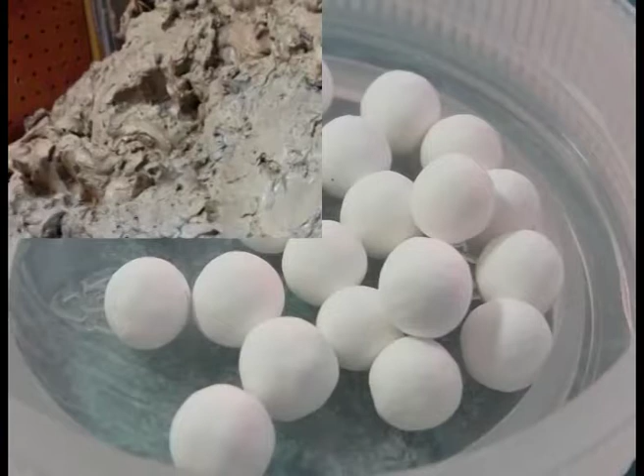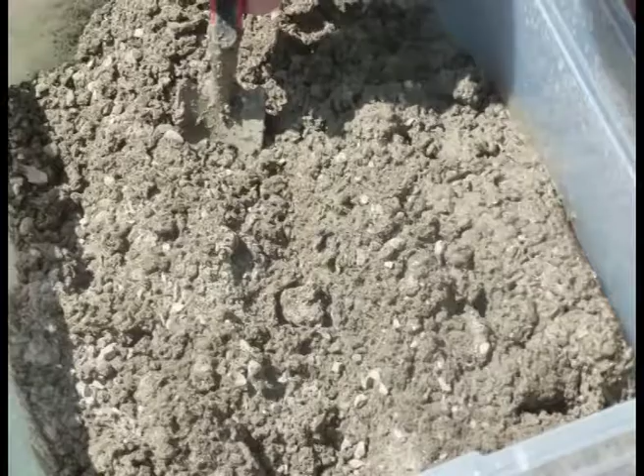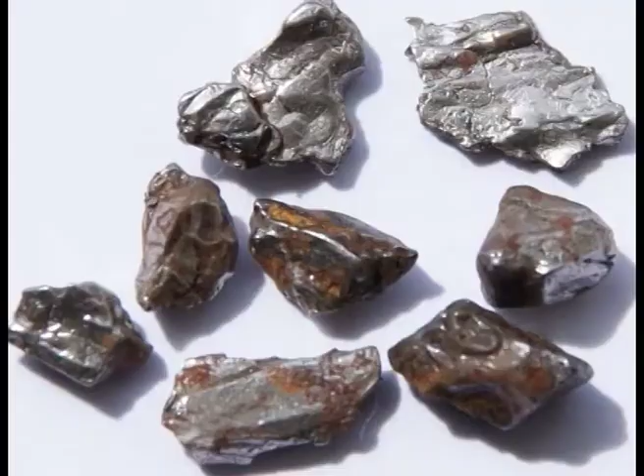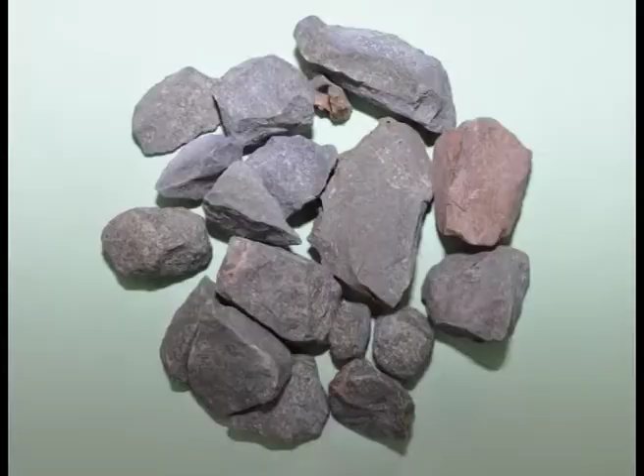If you think of bricks as artificial rocks, cement might be considered artificial lava, a liquid stone that is poured into place where it hardens into solidity. Cement is a manufactured product made by blending different raw materials and firing them at a high temperature in order to achieve precise chemical proportions of lime, silica, alumina, and iron in the finished product known as cement clinker. Cement is therefore essentially a mixture of calcium silicates and smaller amounts of calcium aluminates that react with water and cause the cement to set.

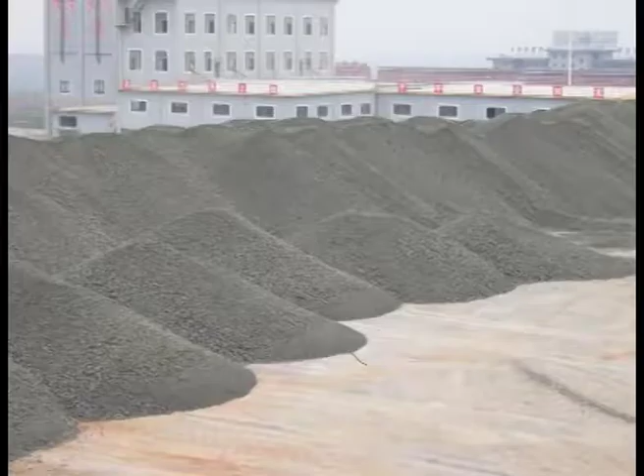The requirement for calcium is met by using high calcium limestone or its equivalent calcareous raw material, and clay, mudstone or shale as the source of most silica and alumina. Finished cement is produced by finely grinding together around 95% of cement clinker with 5% gypsum or anhydrite, which helps to retard the setting time of the cement.

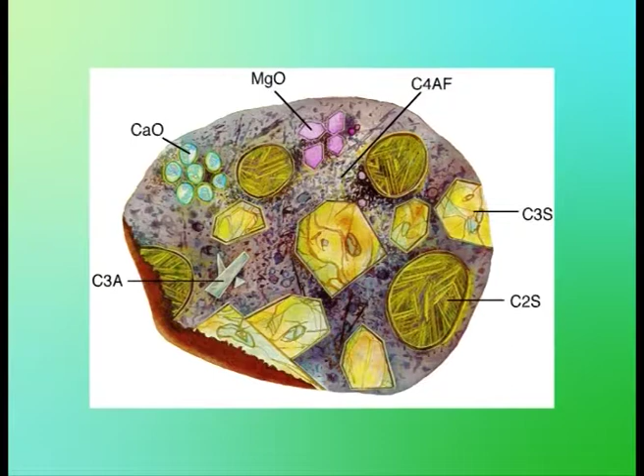The quality of cement clinker is directly related to the chemistry of raw materials used. Around 80 to 90% of raw material for the clinker feed is limestone. Clay raw material accounts for between 10 to 15%, although the precise amounts will vary. Magnesium carbonate, which may be present in limestone, is the main undesirable impurity. The level of magnesia, MgO, in the clinker should not exceed 5%, and many producers favor a maximum of 3%. This rules out dolomite or dolomitic limestones for cement manufacture.

Other deleterious materials include excessive alkalis, Na2O or soda, and potassium oxide, K2O, which would be unacceptable because of durability problems with the concrete due to the reaction of alkalis with some siliceous aggregates to form a swelling gel.

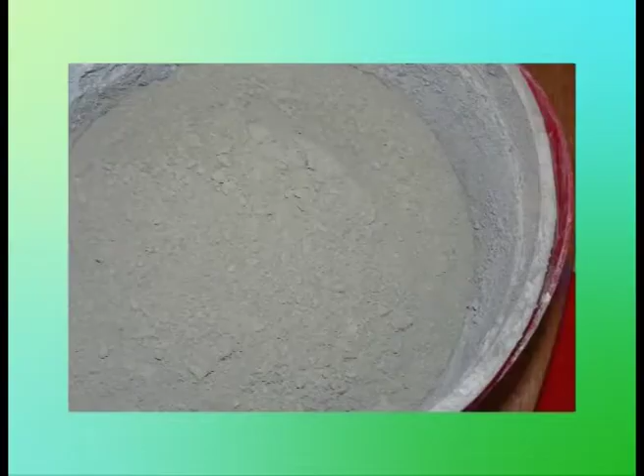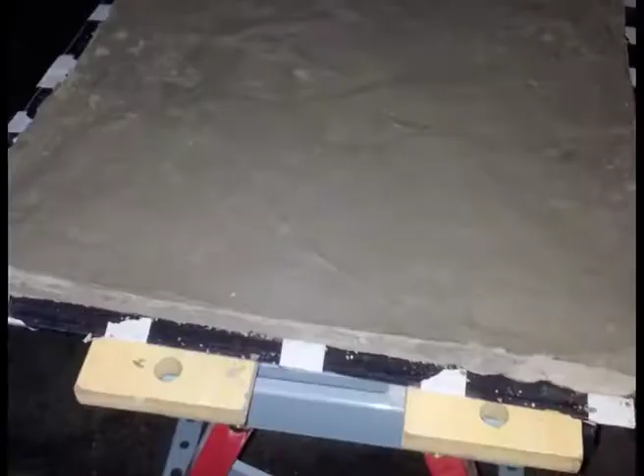Portland cement. Portland cement is the most widely produced cement, both in India and worldwide. The term Portland cement was created by its inventor in 1824 because of the presumed resemblance of the set material to Portland stone, the well-known natural building stone. Other varieties include rapid hardening, low heat, sulfate resisting, and low alkali cements. In addition, blended cements are produced by finely grinding Portland cement clinker with other constituents such as blast furnace slag, natural pozzolanas, silica fume, metakaolin, siliceous fly ash, calcareous fly ash, limestone fines, and shale.

In Europe, for example, these types of cement are standardized to BS EN 197-1. This covers 5 main types of cement used for concrete and indicates the relative proportions of Portland cement clinker, a second main constituent, the standard or 28-day strength class and the rate of early strength gain.

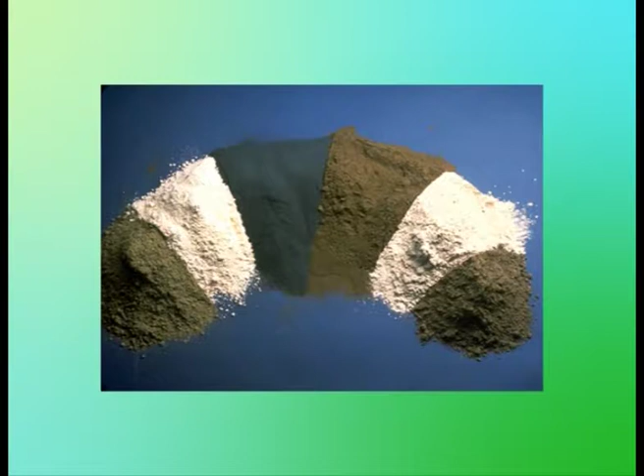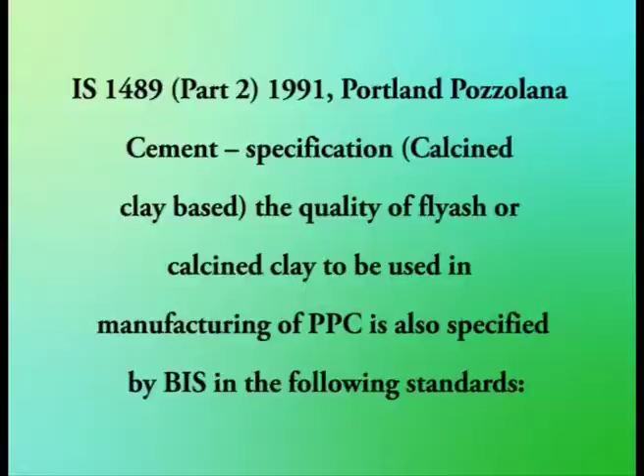The Indian standards for Portland pozzolana cement have been issued in two parts based on the type of pozzolanic materials to be used in manufacturing of Portland pozzolana cement, as given below. IS 1489 Part 1 1991, Portland pozzolana cement specification, fly ash based. IS 1489 Part 2 1991, Portland pozzolana cement specification, calcined clay based. The quality of fly ash or calcined clay to be used in manufacturing of PPC is also specified by BIS in the following standards. IS 3812-1981, specification for fly ash as pozzolana and admixture. IS 1344-1981, specification for calcined clay pozzolana.

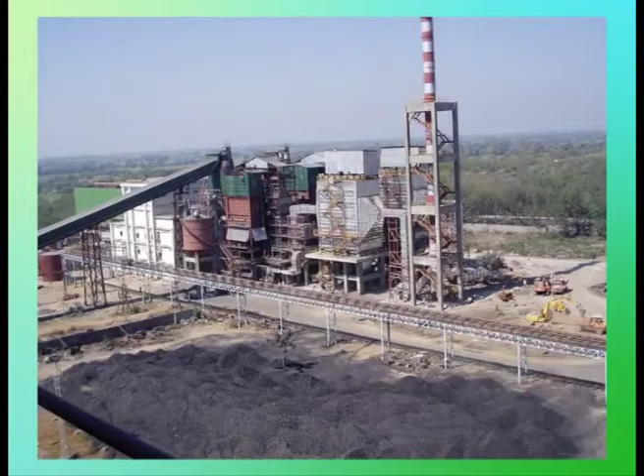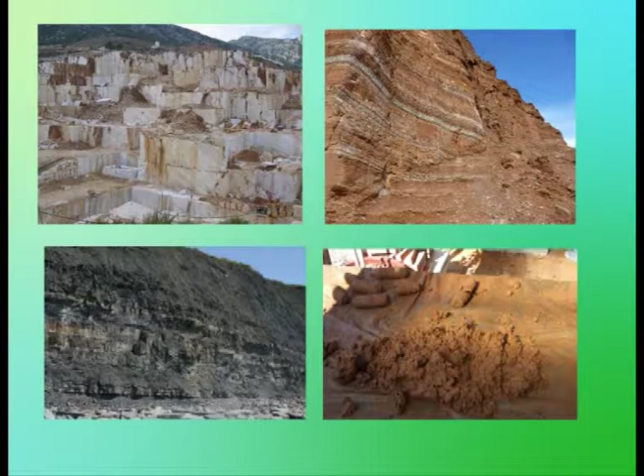Deposits. The availability of suitable raw materials is normally the determining factor in the location of cement works, and these are normally located in close proximity to limestone deposits and ideally close by other major raw materials like clay and gypsum. Limestones, clay, mudstone, and shale deposits are common lithologies and are widely distributed in most parts of the world. Nevertheless, such sedimentary rocks may vary considerably in their chemistry and thickness, and thus in their suitability for cement manufacture on a large scale.

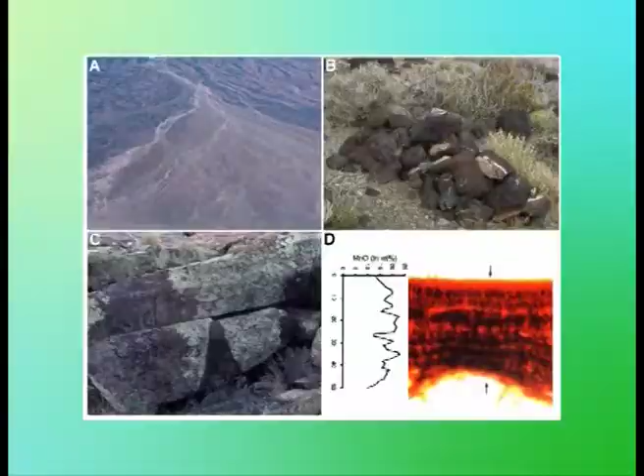Generally, large quantities of a uniform source of calcium, silica, alumina, and iron are required. If uniform raw materials are not readily available, and they rarely are, it is essential that chemical variation within the deposit is known so that development can be planned and proper blending of stockpiles can consistently achieve the desired chemistry. The process of cement making is, however, remarkably flexible in terms of the raw materials that can be used to achieve required chemical compositions. Many limestone deposits, provided they are low in MgO, easily meet the requirements, and a number of other CaO containing raw materials are also known to be used.

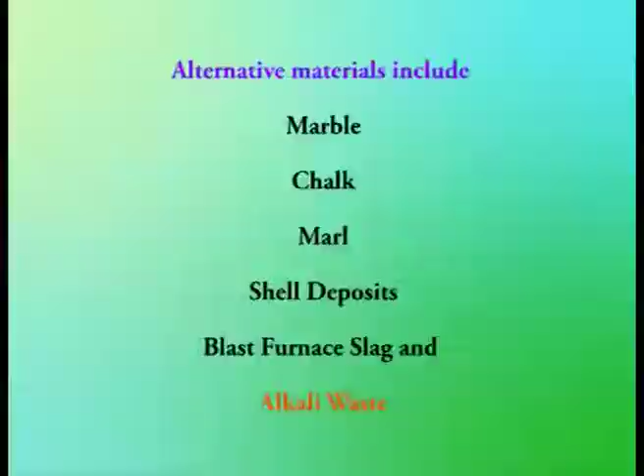Alternative materials include marble, chalk, marl, shell deposits, blast furnace slag, and alkali waste. The overburden to limestone deposits is also used frequently as a source of silica, alumina, and iron. Other mineral components such as iron oxide wastes, silica sand, etc. are sometimes used to blend into the raw material mix to optimize the chemistry. The variety of raw material used worldwide for cement manufacture is very great.

Extraction. The raw materials used in cement manufacture are extracted in large quarries, typically with outputs of up to or over 2.5 million tons per year.

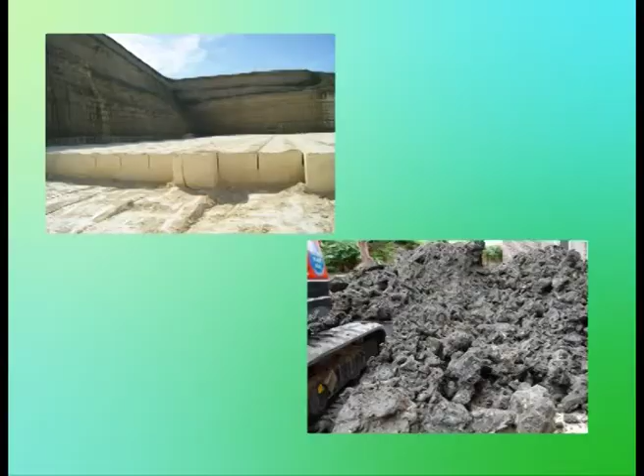Typically about 1.65 tons of limestone, 1.5 to 1.8 tons, and 0.4 tons of clay are quarried for each ton of cement produced. Large reserves of feedstock, particularly of limestone, are required to provide security of supply, and these are normally quarried in close proximity to the cement works. Clay or mudstone may be worked in the same or an adjacent quarry or transported from more distant sites.

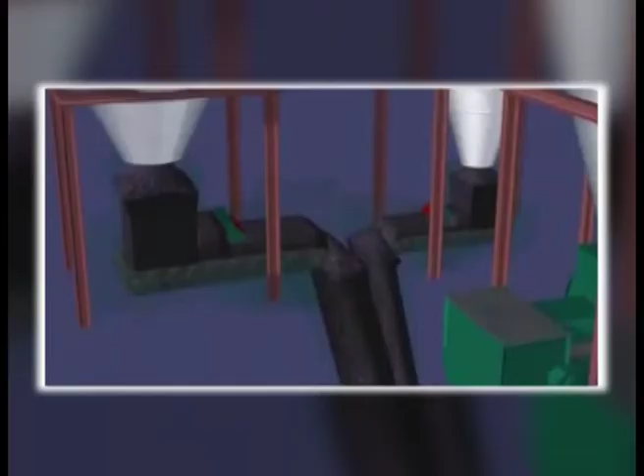The raw materials which supply cement works and which may be required in quantities of over 4,000 tons per day must be thoroughly proven if the plant is to run successfully. Consistent quality feed is required, and an extraction plan must be made to ensure that a uniform flow of raw material will always be available to the kilns.

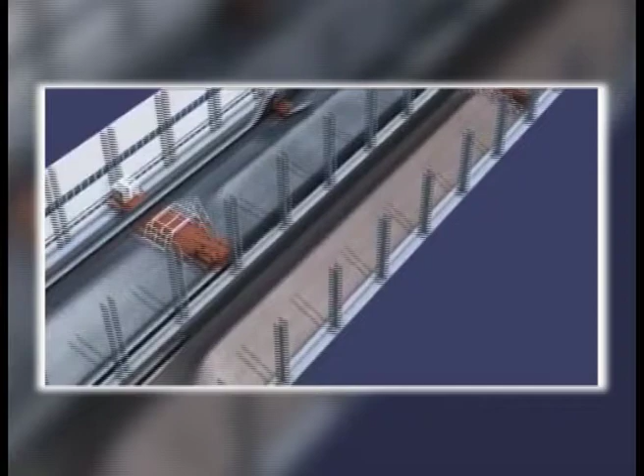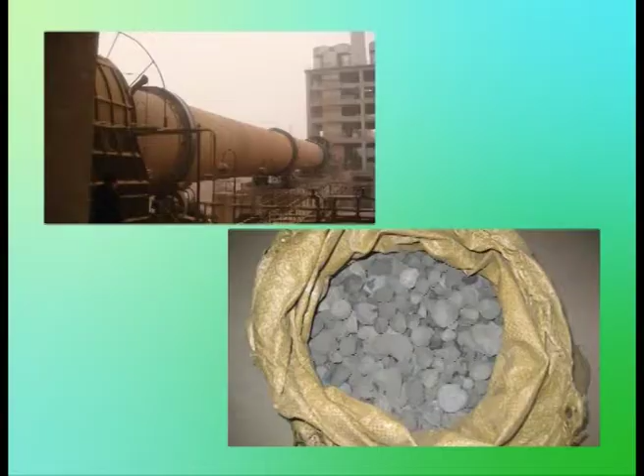Cement making. Cement clinker is manufactured by heating the blended and ground raw material, typically limestone and clay or shale and other materials, to partial fusion. The clinker burn takes place at a temperature of 1450 degrees Celsius in kilns, which are normally inclined, rotating cylinders lined with heat-resistant bricks. Clinker emerges from the kiln after several hours as granulated spherical pebbles.

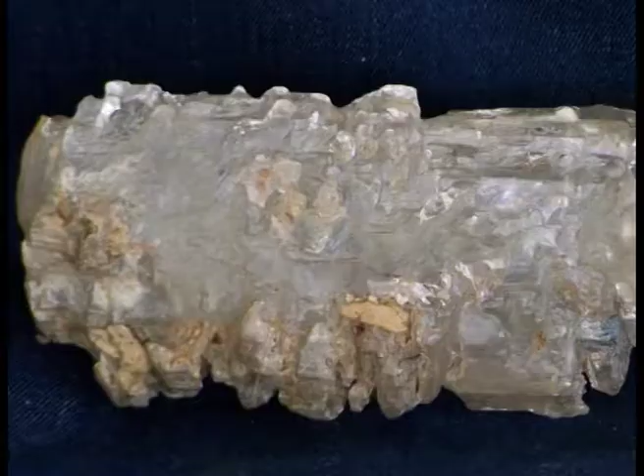Afterwards, the clinker is finely ground by ball milling with a small amount, typically 5%, of gypsum/anhydrite to give Portland cement. Gypsum/anhydrite is introduced to control the initial rate of reaction with water and to allow concrete to be placed and compacted before hardening commences.

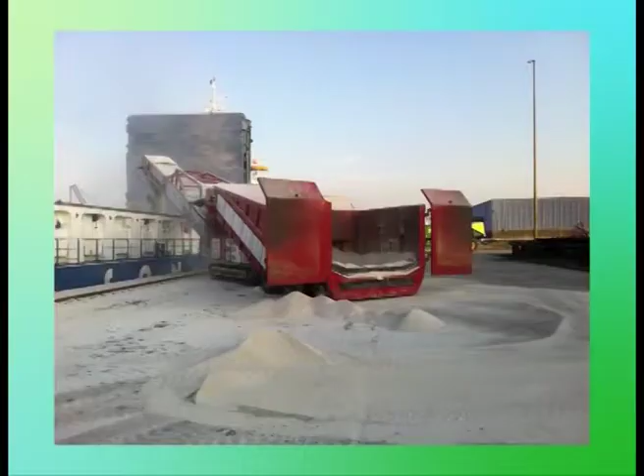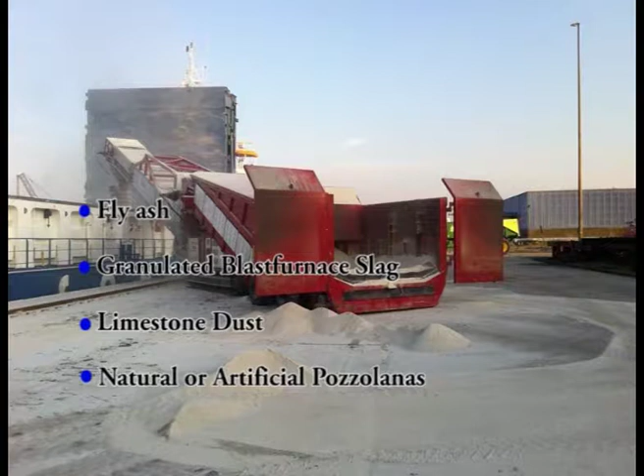Blended cements are produced by intergrinding cement clinker with materials like fly ash, granulated blast furnace slag, limestone dust, natural (for example volcanic ash) or artificial (for example metakaolin) pozzolanas, in addition to gypsum/anhydrite. The finished cement is transported in bulk or in bags to the market. Cement clinker and finished cement are traded internationally.

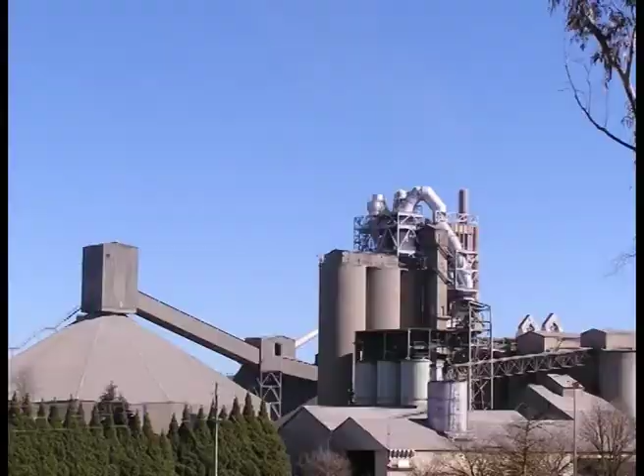Cement manufacture is a very energy intensive process and results in the production of large amounts of carbon dioxide, CO2. The carbon dioxide is chiefly produced when the calcareous raw material is calcined to produce calcium oxide. Generally, around 0.5 tons of carbon dioxide is released for each ton of cement produced, a figure that does not include carbon dioxide released during energy generation to power cement manufacturing plants. Worldwide, it is thought that cement making is responsible for around 7% of total man-made CO2 emissions.

The processes of milling, blending, calcining, and grinding the clinker are described as dry, semi-dry, semi-wet, or wet, depending on how the raw material is handled before being fed into the kiln. Moisture content of the raw materials, ranging from 3% for hard limestone to over 20% for soft limestones such as chalk, is the main criterion governing the process used.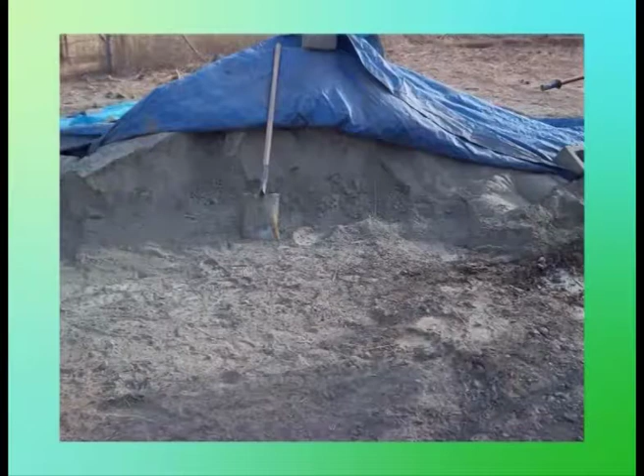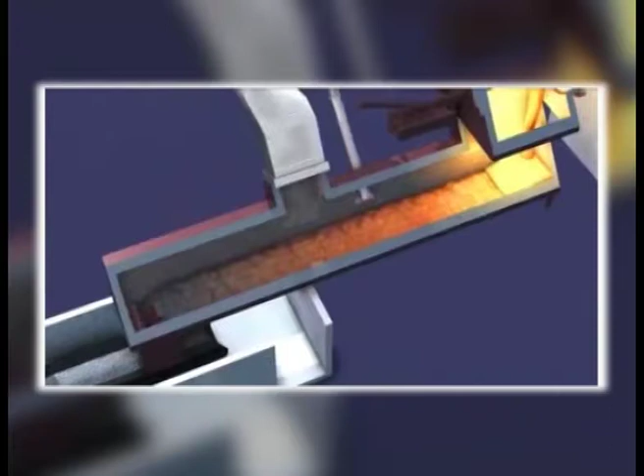In the dry process, the feed material is in a dry, powdered form. It is either preheated by the kiln's hot exit gases prior to entering the kiln (preheater kiln), or, if fuel is added in a special combustion chamber, the calcination process can almost be completed before the raw material enters the kiln (pre-calciner kiln).

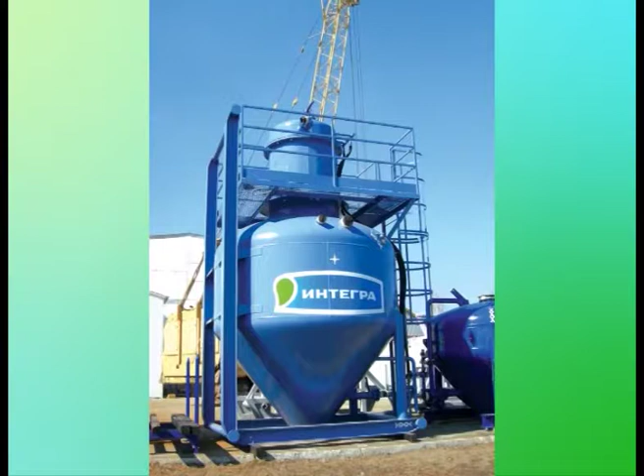In the wet process, the feed material is made by wet grinding and the resulting slurry, which contains typically 30 to 40% water, is fed directly into the kiln. In the semi-dry or semi-wet process, water is either added to the ground dry feed or removed from the slurry by filter pressing, resulting in a feed material containing about 15-20% moisture.

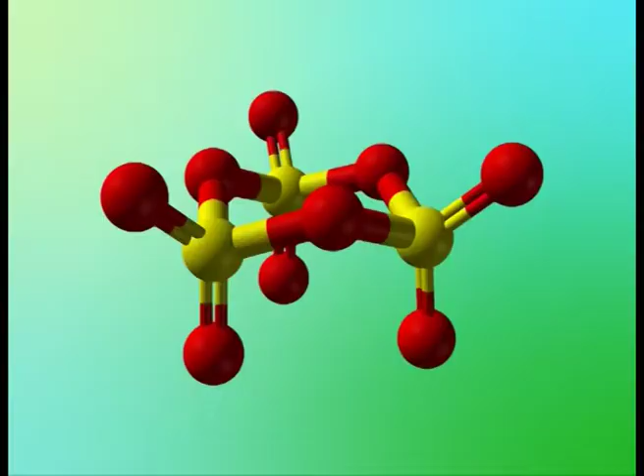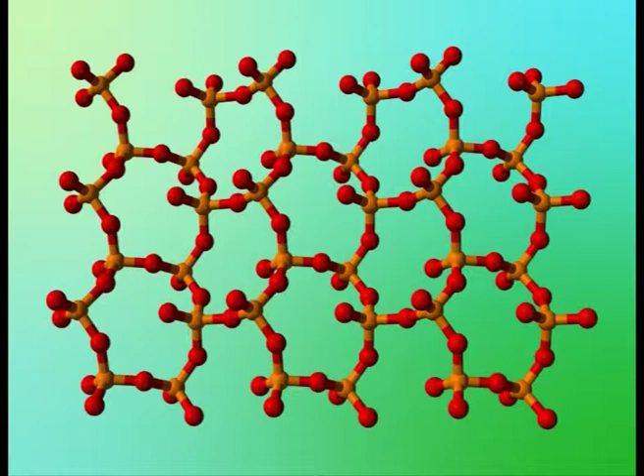Specifications and uses. Most national specifications for Portland cement require that the cement should not contain more than 5% MgO, less than 3% in the limestone raw material. Therefore, identification of dolomite is crucial in the evaluation of carbonate rocks for cement manufacture. Other chemical specifications may limit sulfur trioxide SO3 and phosphorus pentoxide P2O5 to less than 1% and total alkalis to less than 0.6%. Additional specifications may apply to specialty cement types such as sulfate resisting cement, oil well cement, and white cement, for example, less than 0.01% Fe2O3.

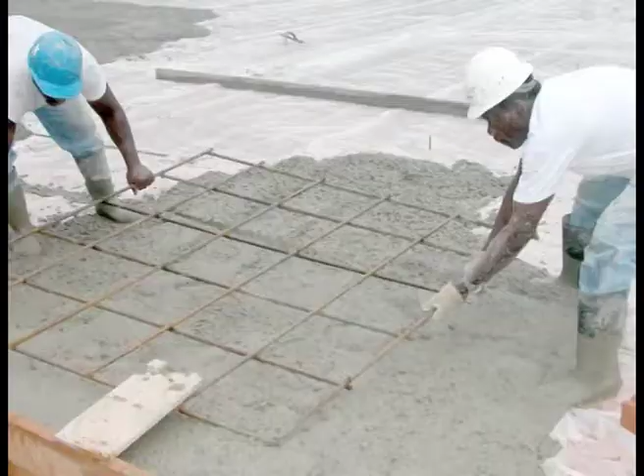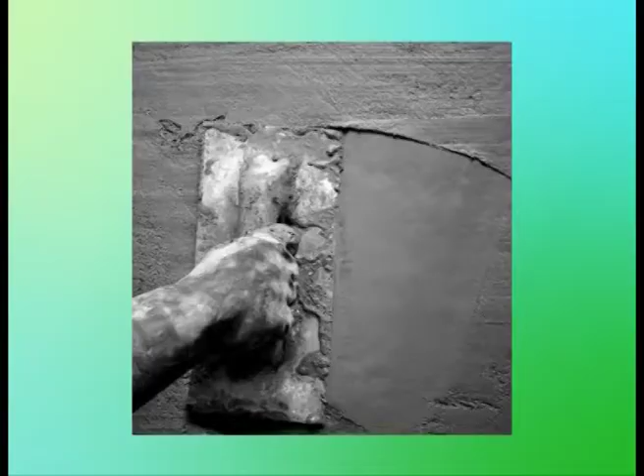Uses. Cement is an essential constituent of concrete, which is a mixture of cement and coarse and fine aggregate. When mixed with water, this material can be placed in situ or cast in molds, such as concrete blocks. It is a highly versatile building material valued for its high compressive strength, fire resistance, moldability, impermeability, and durability. Mortar, a mix of cement, fine aggregate, and water, is used for joining structural blocks, brickwork, and plastering.

Both concrete and mortar are vital and essentially irreplaceable construction materials for the building and civil engineering industries. They are widely used in all construction sectors, including house building, road construction, bridges, and dams, and in other infrastructure projects such as railways, airport facilities, hospitals, schools, new offices, and shops. Demand for cement is a function of economic activity and construction activity, both of which can be highly cyclical.

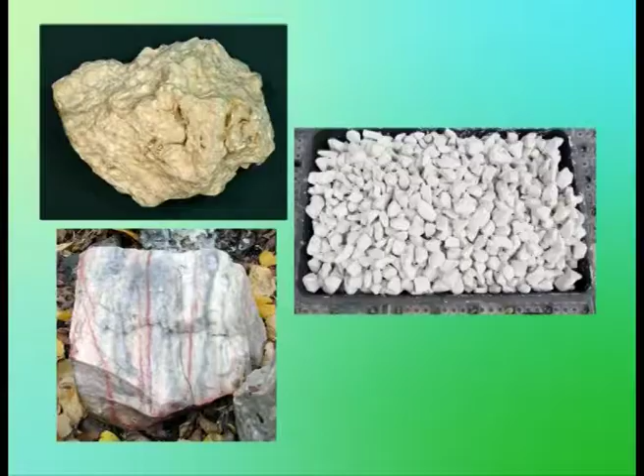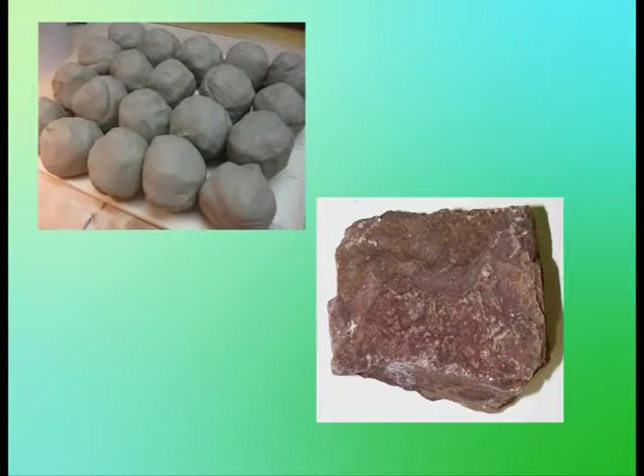Alternative raw materials. The principal objective of using alternative raw materials is to optimize the mix to make best use of available raw materials. A range of calcareous raw materials can be used for cement manufacture, but limestone, chalk, or marble predominate. In most cases, other calcium-bearing sources do not occur in sufficiently large deposits or amounts to be used as alternatives. Clay/mudstone is the main source of silica, alumina, and iron oxides because of its availability and low cost.

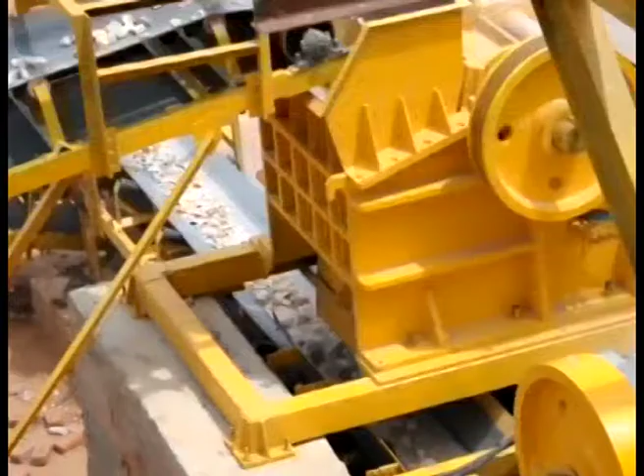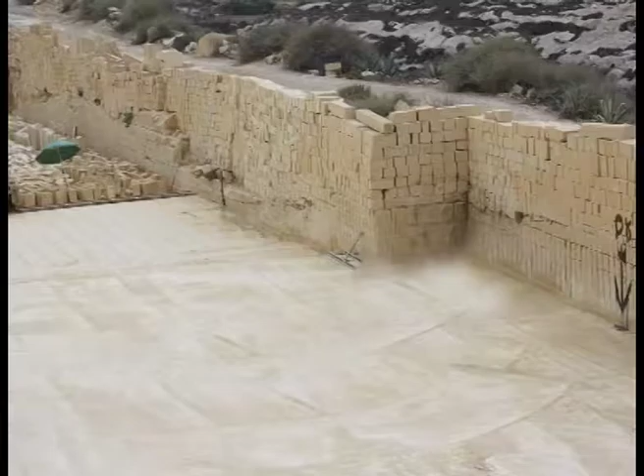However, mudstone often does not supply the correct chemical balance of constituents, and bought-in supplements are sometimes required. These may include silica sand, fly ash, pulverized fuel ash PFA, iron oxides, and bauxite. PFA has a higher alumina to silica ratio than most mudstones and also lower alkalis. It is used in most cement plants to add alumina so that higher silica limestone can also be utilized. It also helps to reduce alkalis. Ash from the coal burn also contributes to the overall chemistry of the cement feed. However, alternative fuels are increasingly substituting for coal.

The production of blended cements is increasing. These may contain, for instance, singly or in combination, a proportion of PFA, a byproduct of coal-fired power stations, blast furnace slag, a byproduct of iron making, tuff, a type of volcanic rock, and limestone dust.

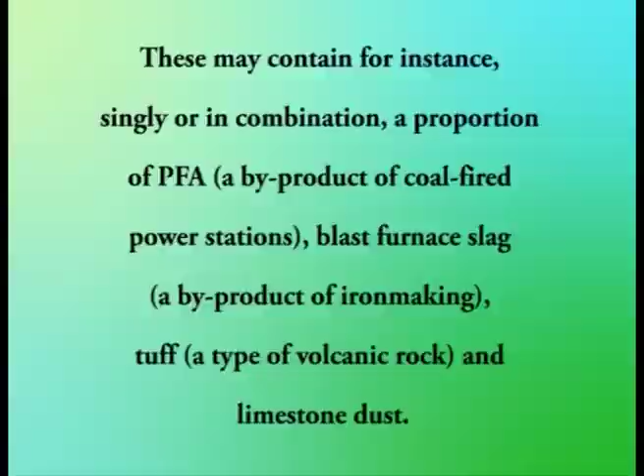These act mainly as lower cost diluents, their main purpose being to reduce the amount of cement clinker used per unit of concrete produced. However, their use may also impart additional properties to the product. Both PFA and slag, for example, have cementitious properties.

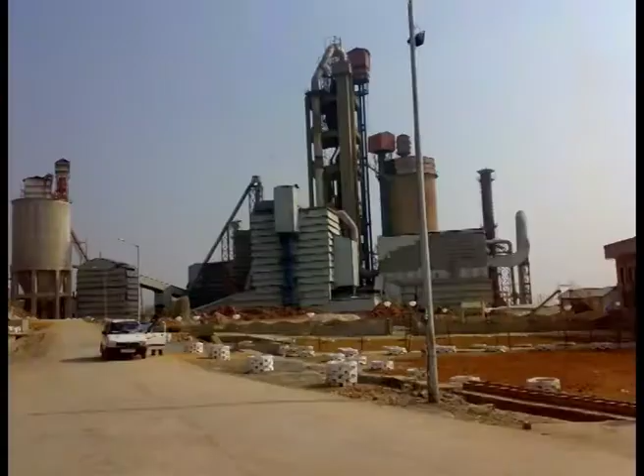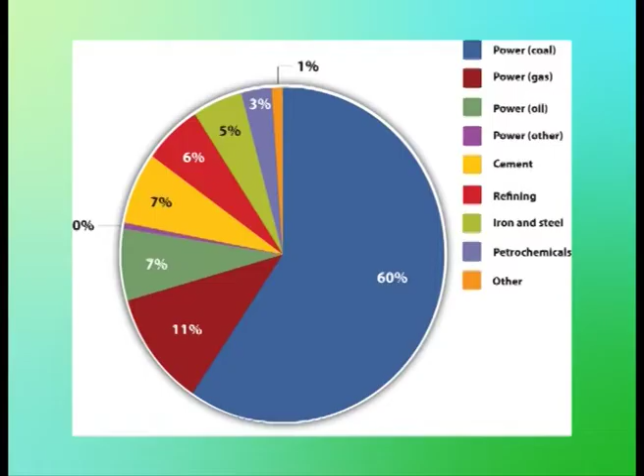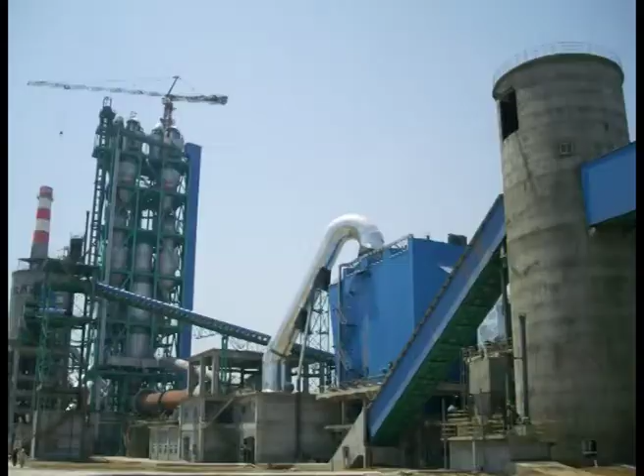The rising costs of raw materials like gypsum and coal have been placing a heavy strain on the cement and construction industry. As a result, Indian cement and plaster board companies have to explore alternative sources of gypsum and coal. The Indian cement industry is comprised of 140 large and more than 365 smaller cement plants.

It is the second largest cement producer in the world with an installed capacity of about 323 million TA in 2011, surpassing the target of 298 million TA fixed for the 5-year period up to March 31, 2012. Economic growth and cement consumption are directly proportional.

The factors that could trigger cement sales are infrastructural demand, especially for government projects, as well as higher housing demand in rural and semi-urban areas. Higher realization and rising dispatches are considered to be conducive for higher profits for the cement industry. All efforts are targeted to increase sales and reach the premium segment in prices.

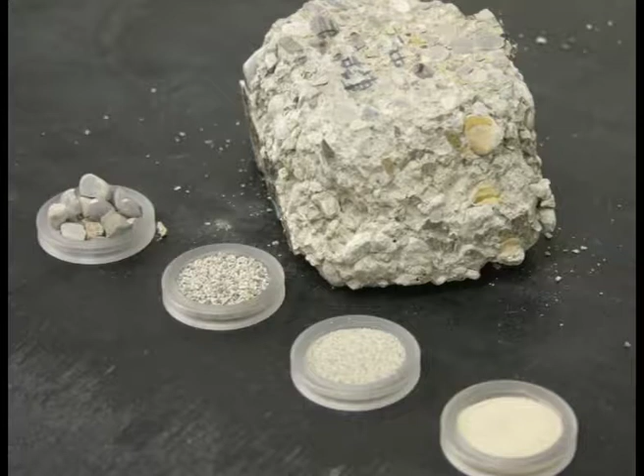The major challenges faced by the Indian cement industry are higher raw material prices, especially the price of coal, gypsum, and fly ash. India's cement manufacturing capacity may increase to 479 million TA by the terminal year of the Plan 12, ending 2017, despite the existing overcapacity scenario as per projections made by a Planning Commission working group on the sector.

The working group, which has already submitted its final report to the Commission for preparing the roadmap for the sector in the plan period 2012-17, has projected a 10 to 11.75% growth in demand, production, and the installed capacity of cement during the 5-year period.

According to the Cement Manufacturers Association (CMA) and AT Kearney, India's cement production will expand to 550 million tons by 2020, and its annual per capita use of cement will rise to 350 kg from 150 kg. McKinsey and Company is targeting to achieve 860 million tons cement capacity by 2030.

According to the various research reports and in view of the upcoming massive infrastructure projects, cement consumption is expected to advance at around 10% CAGR growth during 2012-2014 and thereafter around 9 to 12% per year, which is anticipated to strengthen the long-term investment viability of the Indian cement industry.

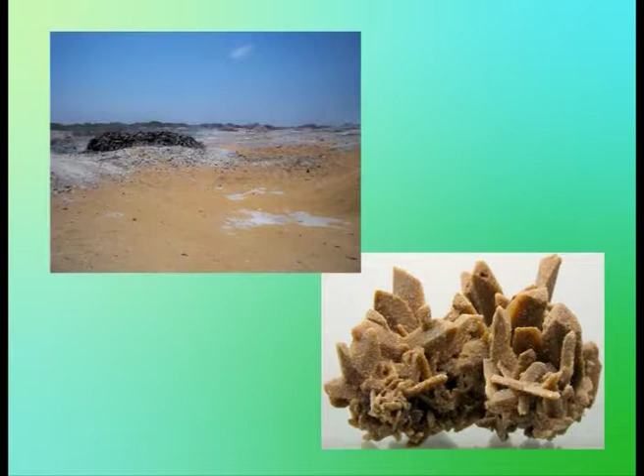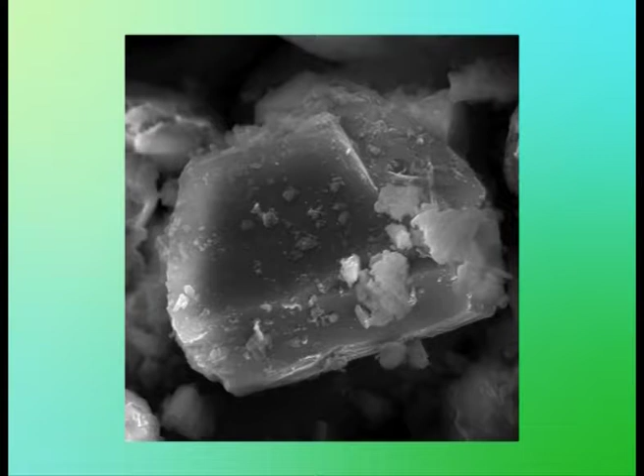As per the Indian Bureau of Mines (IBM), around 5 million tons of waste gypsum such as phosphogypsum, fluorogypsum, etc. are being generated annually. And for the last 3 years, the cement sectors are only using around 2.25 to 3 million tons. Basically, these quantities are almost constant and cannot be increased substantially due to higher transportation costs.

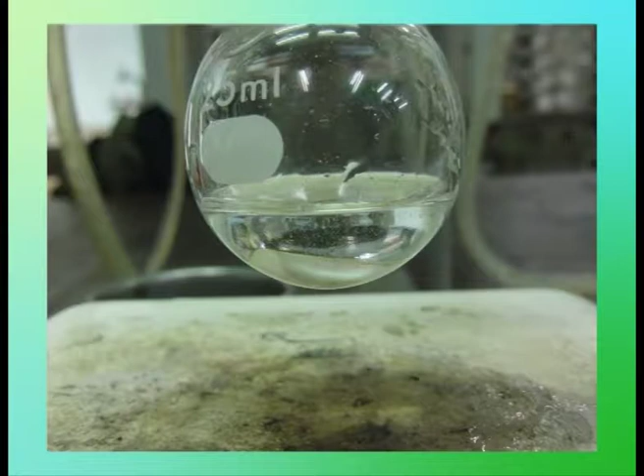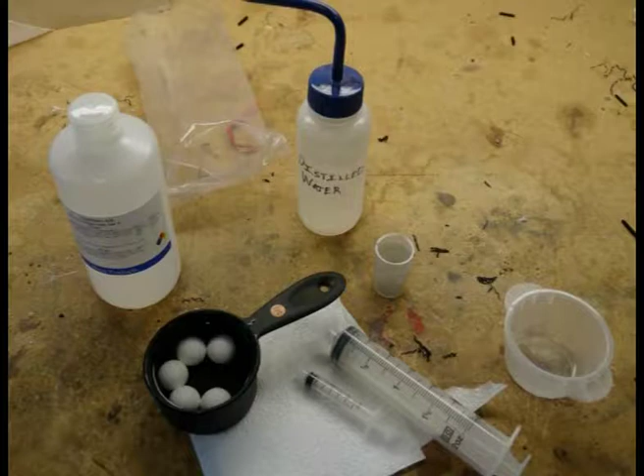Phosphogypsum is a byproduct in the wet process for manufacturing phosphoric acid, ammonium phosphate fertilizer by the action of sulfuric acid on the rock phosphate. The other sources of phosphogypsum are byproducts of the hydrofluoric acid and boric acid industries.

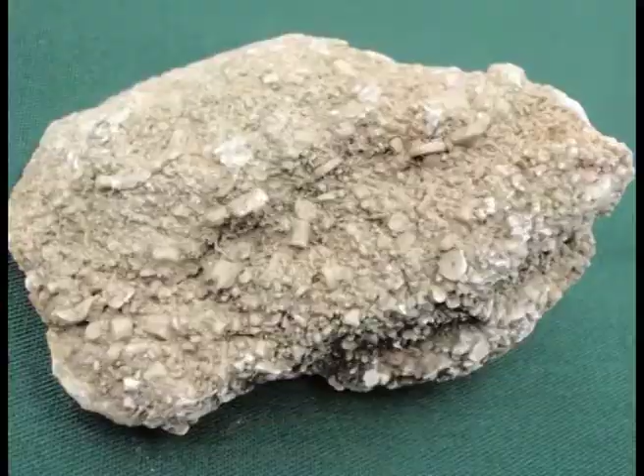Indian cement companies are on the lookout for overseas mines to secure supplies for gypsum, a key ingredient for manufacturing the building material. Domestic supply of gypsum is limited, which is forcing Indian cement makers to look for acquisitions of overseas mines, or even look at producing a synthetic form of the raw material.

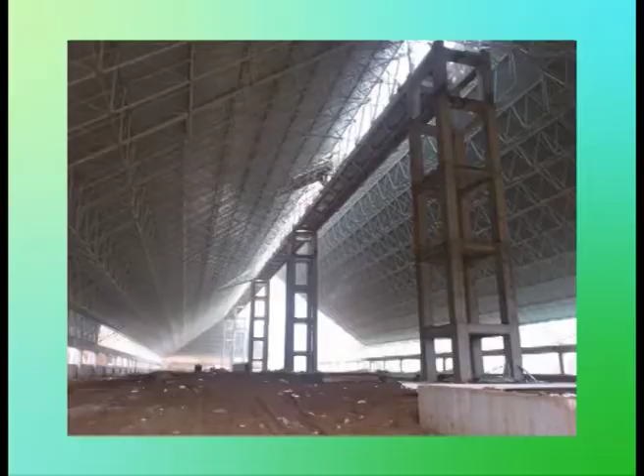1 ton of gypsum in a reserve typically costs around $26 to $30, rupees 1,560 to 1,800, and the average size of a mine overseas ranges between 30 and 40 million tons. This takes the minimum total cost to roughly $780 million. Indian companies are eyeing reserves located in Thailand, Oman, Iran, and other countries in close proximity to India.

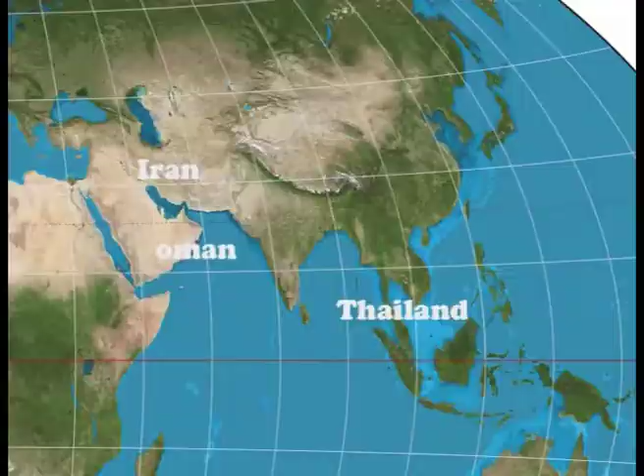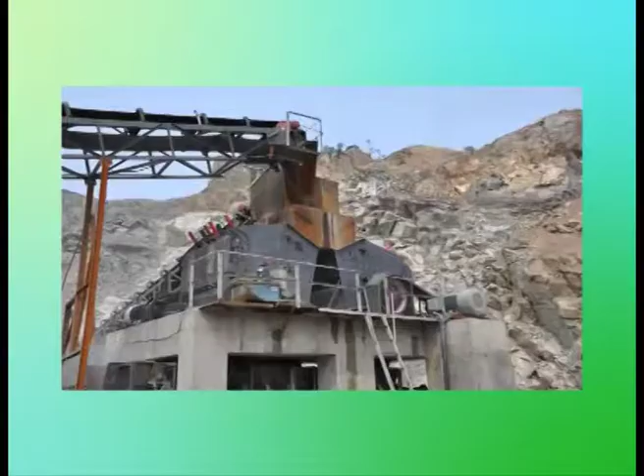According to a research report jointly published on 30th April 2014 by lobby group Confederation of Indian Industry and consulting firm A.T. Kearney, India has a paucity of gypsum resources, which does not bode well for the cement industry. The production deficit in the domestic market has led to increased dependence on imports and synthetic gypsum to meet production demand, the report said. Manufacturing 1 ton of cement generally requires 4 to 5% of gypsum as a raw material, it added.

The report said that at present, usable gypsum reserves in India amount to 140 to 150 MT, of which around 125 MT is available to the industry. These numbers are for Rajasthan and Gujarat, as reserves in other states are unusable. This available supply will be enough to support the cement industry for the next 7-8 years, beyond which the sector will need to rely on imports, the report added.

Impact of cement industry. Human environment. Increased direct and induced employment opportunities, income and wealth. Increased goods and services. Improved access, particularly to previously inaccessible areas. Conflicts with existing land uses and displacement of existing uses.

Subsistence risk to local farmers and rural livelihoods and cultures, damage to cultural sites, increased demands on services and facilities, social and cultural conflicts, community instability, boom-bust economies, displacement of local populations, road damage, traffic delays, health and accident risk, secondary developments. Natural environment: impacts on landform.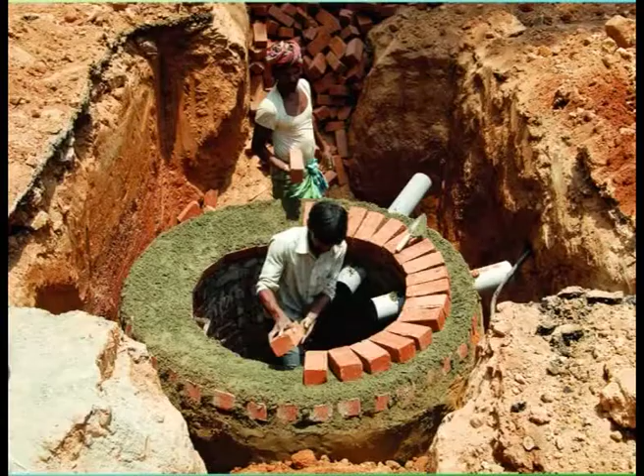Removal and transfer of large amounts of rocks and soil and its deposition as spoil elsewhere. Total disruption and modification of landscapes. Changes, possibly irrevocable, to underground and surface drainage. Loss of existing land uses. Loss or burial of vegetation and farmland under mine spoil. Damage to wetlands and coastal areas.

Use of stream banks and shorelines for waste disposal and ancillary facilities, disruption, blockage, and rerouting of stream channels and creation of residual ponds. Land impacts on terrestrial ecology. Reduced reproduction and population of wildlife due to habitat modification and loss, for example breeding grounds, nurseries, and indirect disturbances from noise and fumes. Increased wildlife mortality from road traffic and surface disturbance, degradation of vegetation and soil from flooding of

contaminated watercourses, modification of vegetation and introduction of non-native species, loss of birds and animals due to contamination from tailing and leach ponds, denuding of vegetation due to toxicity. Water impacts on aquatic ecology. Stream siltation and other forms of degradation of surface waters by soil erosion from disturbed areas, waste piles and stockpiles. Downstream water quality impairment and damage to aquatic flora and fauna.

Contamination of surface waters and groundwaters. Disruption, blockage of surface waters, intensifying local flooding problems and affecting aquatic ecology, including fisheries. Deepening of stream channels. Reductions in local water supplies. Impacts on soil. Contamination of surface areas with mineralized toxic rock material, for example, deposition of mining wastes. Impacts on air. Degradation of air quality and visibility from airborne particulates resulting from blasting, excavation, earth moving, transportation, and material transfer operations.

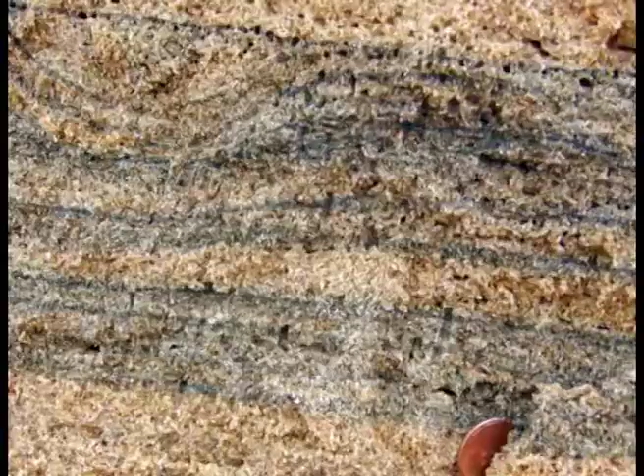Conclusion. In the early 1950s, the cement industry began putting a new emphasis on geology. Portland cement can be made from relatively abundant industrial minerals in rocks, and this may explain why cement producers placed little emphasis on geology during the early days of the industry. After World War II, however, the industry began to recognize the need for geological exploration, and some of the larger companies began to build a permanent geological staff.

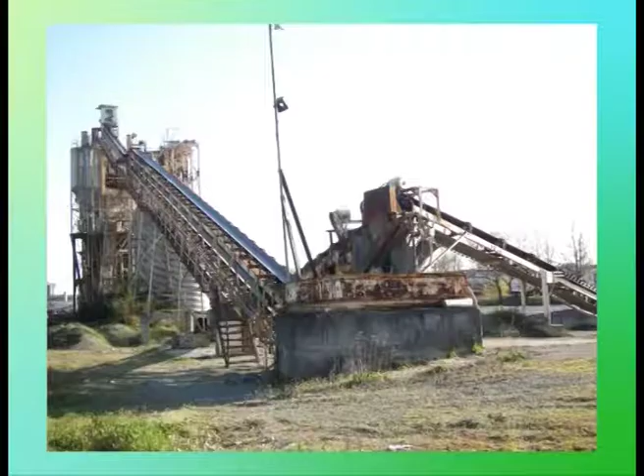This development has its roots in the rapid expansion of the industry after World War II and continuing into the early 1950s; the demand for cement far exceeded the production capacity. This placed a great deal of pressure on the producers to enlarge capacity at their plants and to develop new sites. The closing of many cement plants due to inadequate raw materials: producers feared lack of raw material due to inadequate exploration and evaluation.

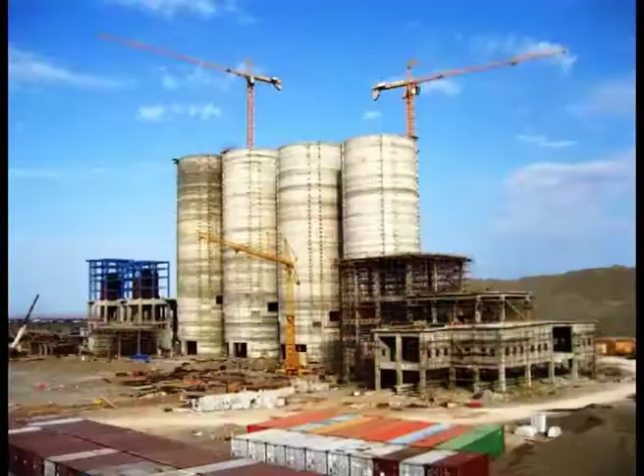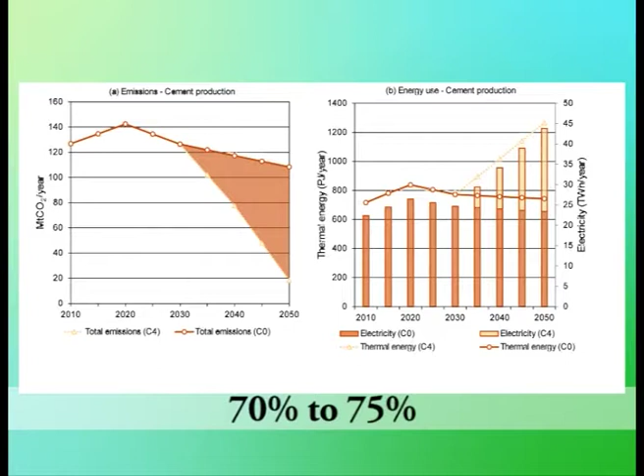An ever-increasing pressure for upgrading of the quality of Portland cement necessitated upgrading the quality of raw materials. The increasingly large capital investment needed to build new cement plants required a higher degree of accuracy in reserve calculation. For example, cement production capacity grew so rapidly that today production is only about 70 to 75% of rated capacity, 73.8% in 1963. Therefore, whereas the geologist's function during the active expansion of capacity was primarily one of exploration, one of his major functions today is the development of existing reserves.